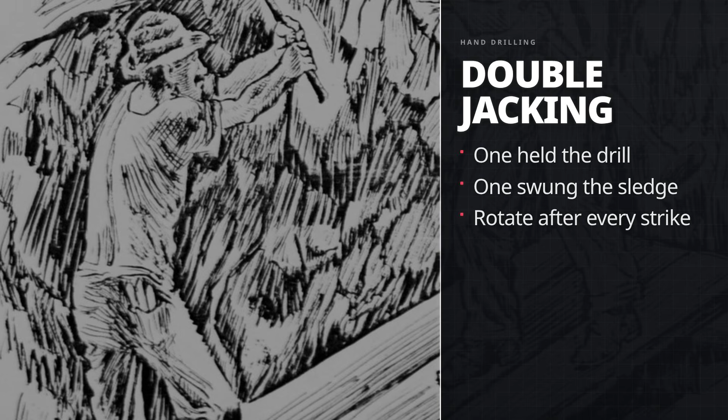Hour after hour: swing, rotate, swing. The sound inside the tunnel was a constant ringing of steel on steel, echoing off the wet rock walls in a space barely wide enough for two men to stand shoulder to shoulder. If you have never seen double-jacking done, you cannot fully appreciate what it demands. The man holding the drill trusts the man swinging the hammer with his hands, his fingers, his life.

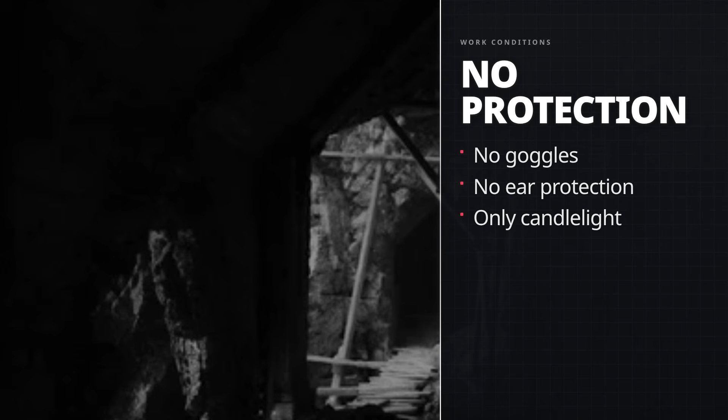A missed strike does not bruise, it shatters bone. The drill holder sits or crouches inches from the rock face, his ears ringing, his hands numb from vibration, stone chips peppering his face and eyes with every blow. There were no safety goggles. There were no ear protections. There was a candle or a whale oil lamp stuck to the wall with clay, and the air smelled of sulfur and sweat and wet stone, and you could taste the rock dust on your tongue.

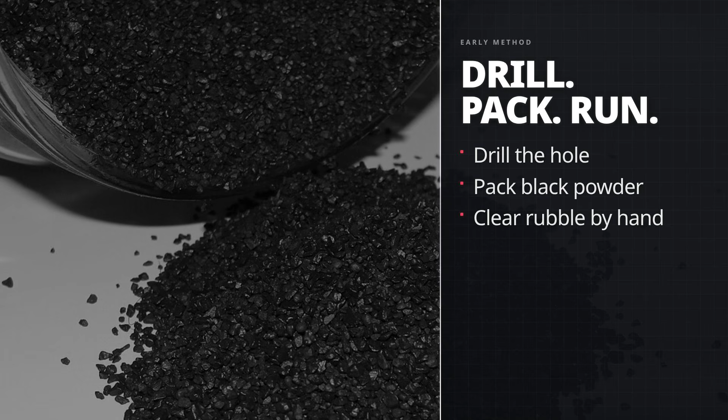They did this for 10 hours a day. When a hole was deep enough, perhaps 18 inches, perhaps 2 feet, they packed it with black powder and lit a fuse and ran. The explosion in that enclosed space was concussive, a punch of pressure and sound that left men's ears ringing for hours. Then they went back in, cleared the rubble by hand into wheelbarrows, and started drilling the next hole.

The rate of advance by hand was measured in inches per day. Some weeks, a crew might move the tunnel face forward 8 or 10 feet. On bad weeks, when they hit a seam of quartz so dense it dulled every drill they owned, they might manage 3. At that pace, boring 4 3/4 miles of tunnel would take longer than anyone involved would live. The mathematics of it were merciless.

25,000 feet of rock at 10 feet per week is nearly 50 years. Half a century of men swinging hammers in the dark.

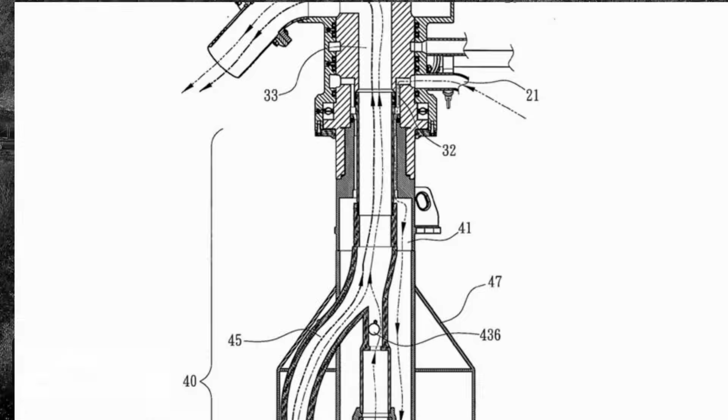Hermann Haupt arrived in 1856, brought in by a group of investors led by Edward Serrell. Haupt had engineered the Horseshoe Curve and the Gallitzin tunnels through the Allegheny Mountains for the Pennsylvania Railroad. He was one of the finest railroad engineers in the country. He also brought something the project desperately needed, which was his own money. He invested $20,000 personally and soon discovered that his fellow investors could not raise their share. Haupt became the largest single investor in a project that was already bleeding cash.

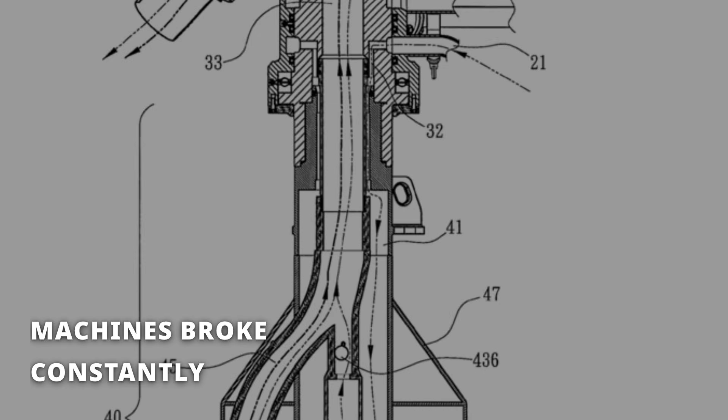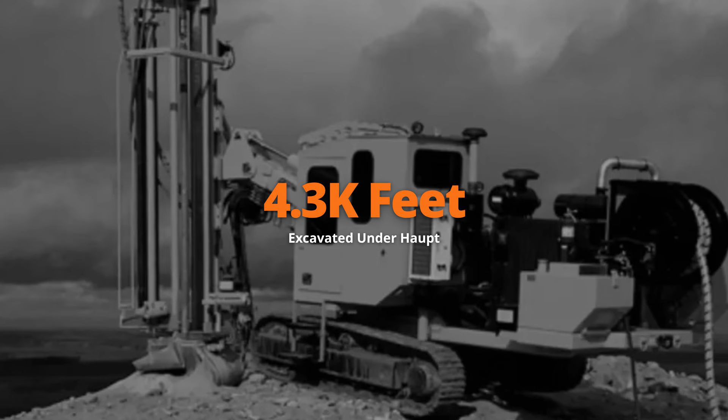Haupt pushed forward anyway. By the time he left the project in 1861, he had excavated about 4,250 feet, roughly 1/5 of the total distance. On the east end, they had managed 500 feet. On the west, 1,810. But Haupt did not leave by choice.

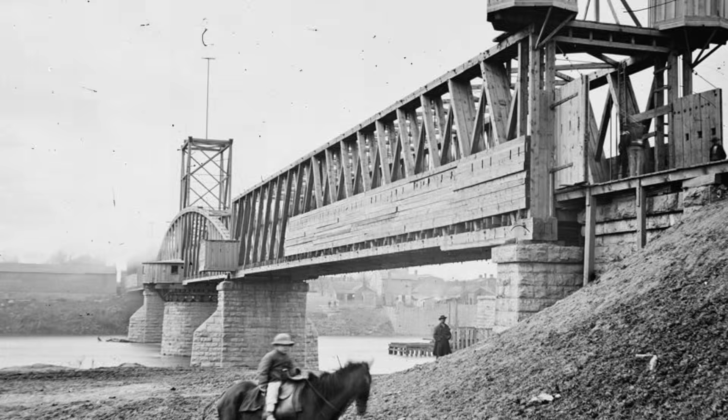The Western Railroad, a competing line that ran a southern route through Springfield and Pittsfield, had been fighting the Hoosac Tunnel from the beginning. They lobbied the Massachusetts legislature relentlessly to block state funding, and in 1861 they succeeded. The money stopped. The Troy and Greenfield Railroad went bankrupt. Haupt was financially ruined. And then the Civil War called him to Washington, where he would become one of the most important military railroad engineers the Union Army ever had, rebuilding bridges and rail lines under fire for the battles of Bull Run and Gettysburg.

He never came back to the Hoosac. He spent the rest of his life trying to recover his investment and received, after decades of litigation, 8 cents on every dollar he had put in.

The tunnel sat mostly idle for 2 years. Water seeped through the rock and pooled in the unfinished bore. Timbers rotted. The few men left on site did maintenance work and little else. The mountain was winning. In 1863, the Commonwealth of Massachusetts foreclosed on the Troy and Greenfield Railroad and took direct control of the tunnel project.

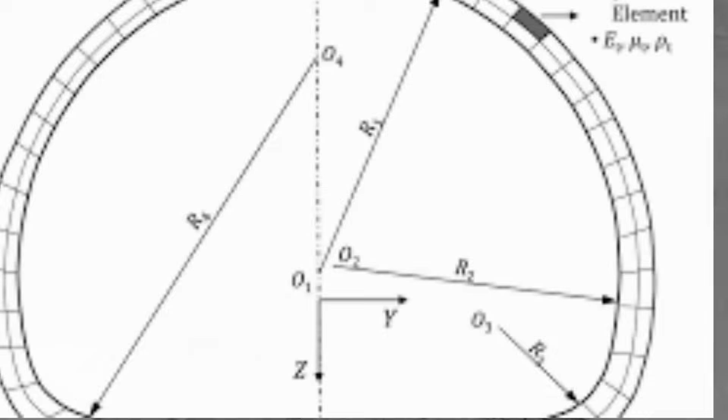Alvah Crocker, now the state superintendent of railroads, appointed Thomas Doane as the new chief engineer. Doane was methodical, where Haupt had been visionary. He did not invent new machines. He studied the ones that existed and figured out how to make them survive inside the mountain. But the real problem was not machinery. It was geometry. The tunnel had to be straight, dead straight.

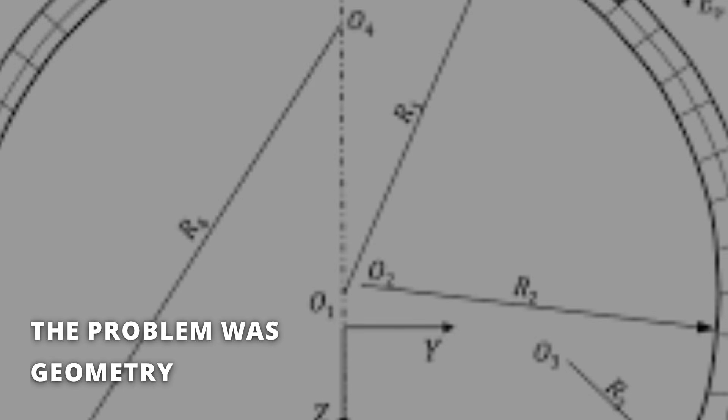4 3/4 miles of perfect alignment through solid rock, bored from two ends that could not see each other, with the mountain itself blocking any line of sight between them. If the two halves missed each other by even a few feet, the entire project could fail. And Doane knew that working from only two faces, east and west, would take decades more.

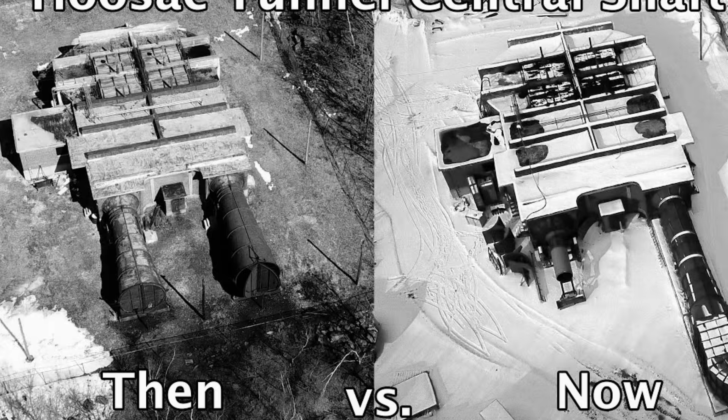So Doane proposed something that had never been attempted at this scale in America. He would sink a vertical shaft from the summit of the mountain straight down into the projected path of the tunnel, 1,028 feet below the surface. Once the shaft reached tunnel level, crews could begin digging outward in two directions from the center, creating 4 working faces instead of 2. The tunnel could then be excavated simultaneously from the east portal, the west portal, and both directions from the central shaft.

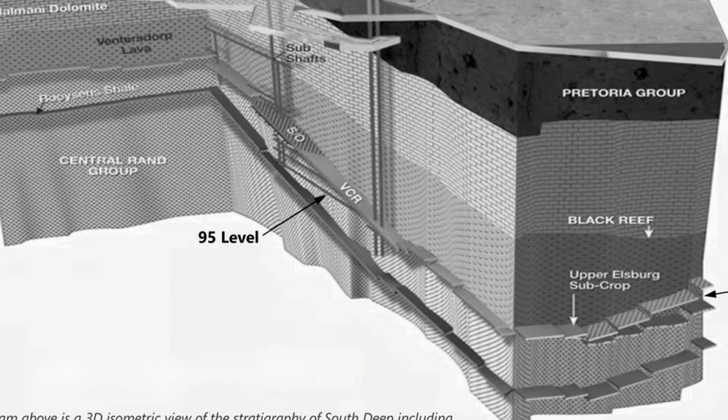The math was simple. 4 faces meant roughly twice the speed. The problem was the shaft itself: 1,000 feet straight down through living rock.

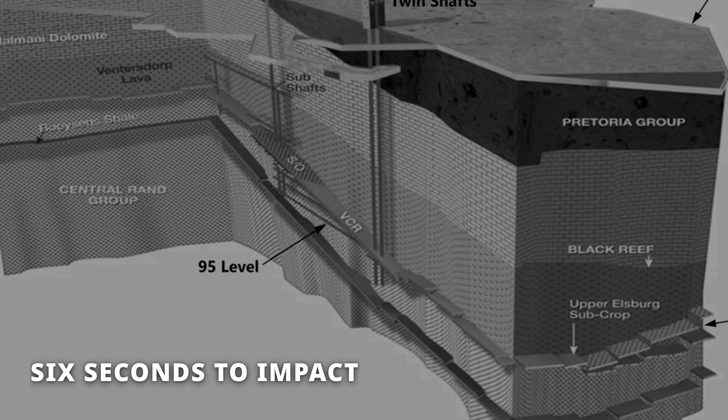Think about what that means. Imagine standing at the edge of a hole in the earth that drops straight down for 1,000 feet. That is taller than any building in America at the time. Taller than any building in the world at the time. You cannot see the bottom. You cannot hear the bottom. If you dropped a stone, you would count to 6 or 7 before you heard it hit.

You lower men and equipment on a wooden hoist down a hole barely wide enough for the platform. And at the bottom, they work in near total darkness, breathing air that has traveled 1,000 feet through a stone chimney to reach them. The temperature at the bottom of the shaft was constant, around 50 degrees, summer and winter, and the humidity was close to 100%.

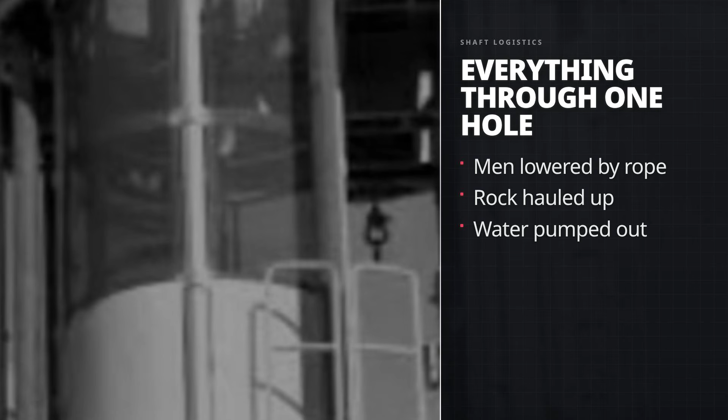Water dripped from every surface. The walls were slick with condensation. Every bucket of broken rock must be hauled back up that same shaft. Every barrel of water must be pumped out. Every tool, every timber, every ounce of black powder must go down the hole before it can be used. And the men who worked at the bottom rode an open wooden platform, suspended on ropes, with nothing between them and 1,000 feet of empty air except the strength of the hemp and the reliability of the winding mechanism above.

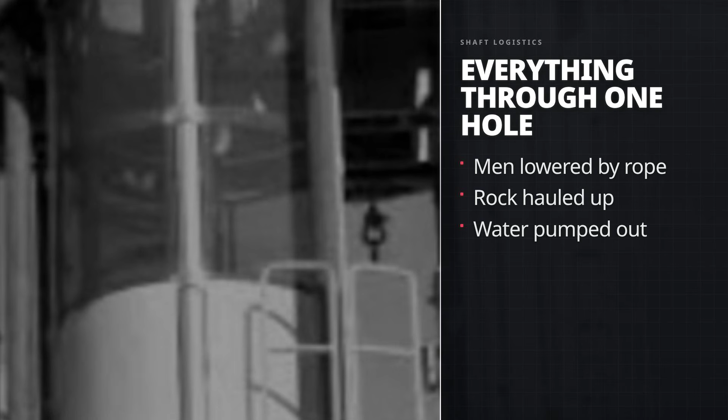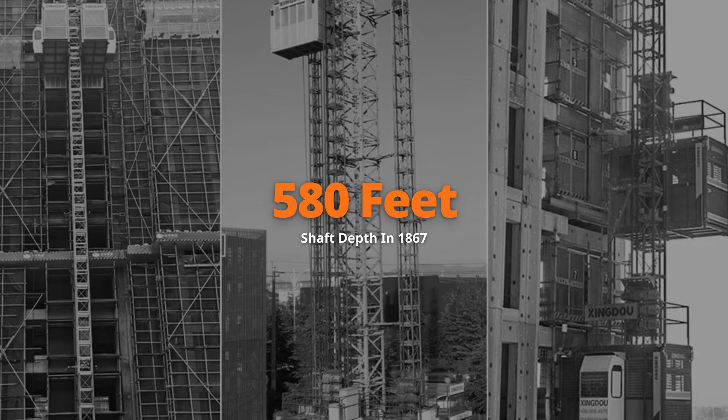Work on the central shaft began in 1863. It was slow, dangerous, miserable labor. By October of 1867, the shaft had reached a depth of roughly 580 feet. A hoist building sat on the surface directly above the shaft, housing the winding mechanism, the ropes, the tools. It also housed flammable materials, including oil for lamps, black powder for blasting, and a device called a gasometer that used gasoline fumes for illumination.

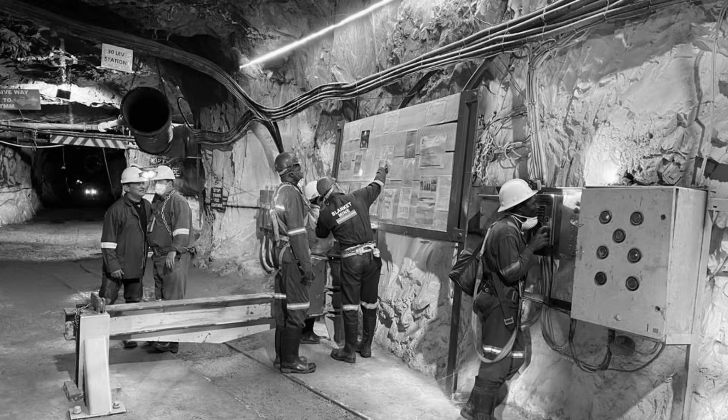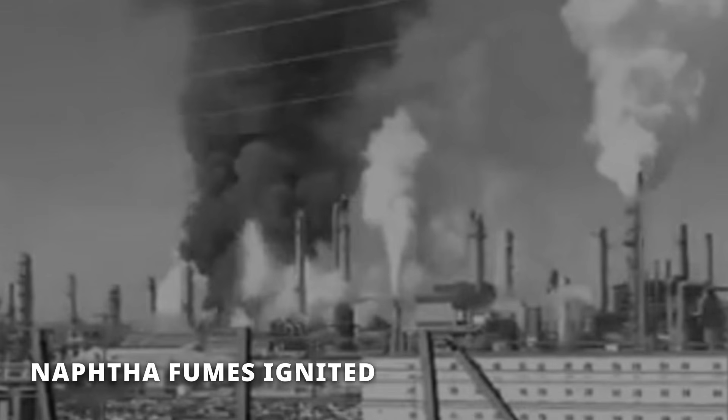On October 17, 1867, just after noon, 13 men descended into the shaft on the wooden platform. They were lowered to the bottom to continue digging. On the surface, 4 men worked in the hoist building. At some point that afternoon, a candle, or a spark, ignited naphtha fumes that had leaked from the gasometer. The explosion was immediate. Fire engulfed the hoist building, and the 4 men on the surface barely escaped with their lives. They tried to fight the fire.

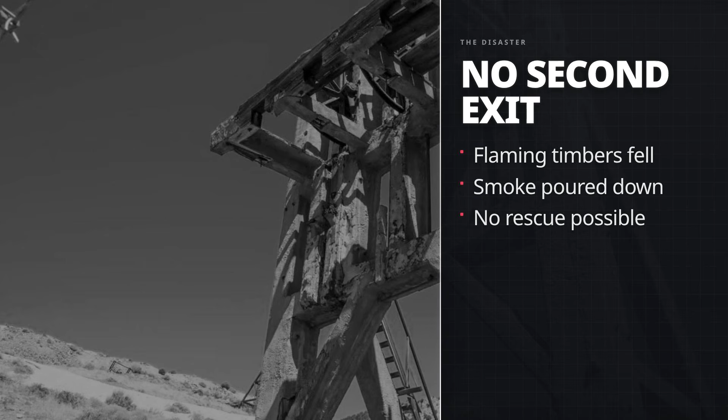They failed. The burning building collapsed directly into the open shaft, sending flaming timbers, machinery, and debris raining down 580 feet onto the 13 men below. Some of them were killed instantly, impaled by falling drill steel or crushed by burning timbers. Others were not killed by the falling debris. They were killed slowly, by the carbon monoxide and smoke that poured down the shaft like poison poured into a well. There was no second exit. There was no ventilation. There was no rescue.

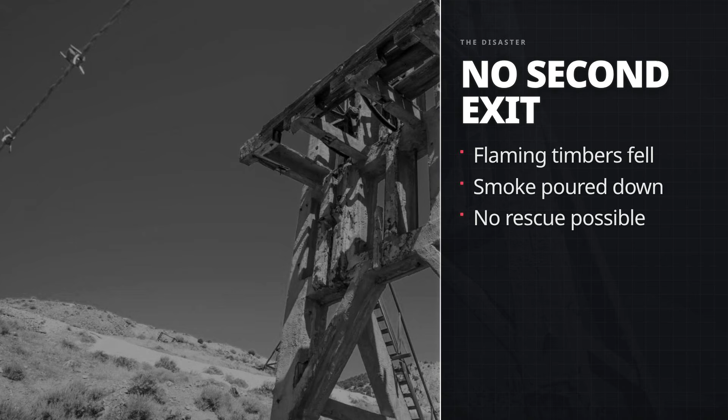It took a full year before crews could even recover the bodies. 13 men dead. It was the single deadliest day in the history of the Hoosac Tunnel, and it nearly ended the project entirely. Newspapers across Massachusetts called for the tunnel to be abandoned. Critics, including a young lawyer named Oliver Wendell Holmes Jr., who would later sit on the Supreme Court, had long mocked the project as the Great Bore.

Now they had 13 more reasons to bury it. But the state did not stop, and the reason was economic desperation. Massachusetts needed that western rail connection. The money already spent was a sunk cost so enormous that abandoning the tunnel would have been its own kind of catastrophe.

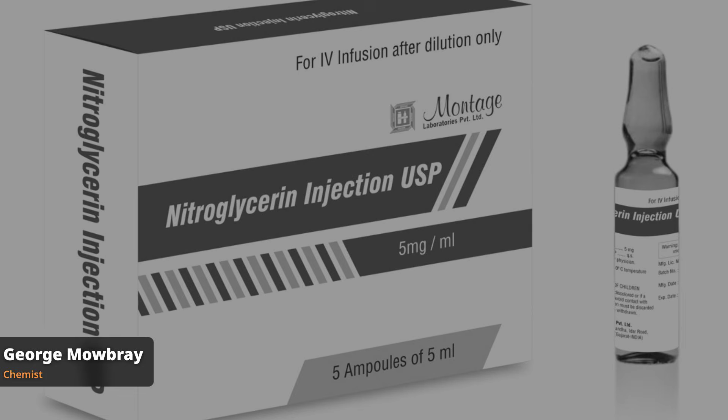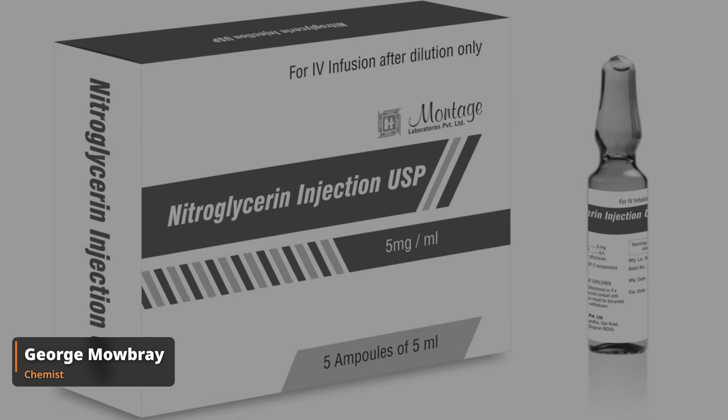So they pressed on, and in doing so, they reached for technologies that had never been used at this scale in America. The first was nitroglycerin. Black powder had been the standard explosive since the tunnel began, but black powder was slow and weak. It cracked rock, it did not shatter it. A chemist named George Mowbray, working out of a small laboratory in North Adams, had been following European experiments with nitroglycerin, an explosive 10 times more potent than black powder.

In 1866, Mowbray developed his own method for producing a modified form he called trinitroglycerin, and Thomas Doane authorized its use inside the tunnel with an electric firing system that allowed detonation from a safe distance using blasting caps and battery-powered circuits. The difference was immediate and staggering. Where black powder cracked and loosened rock, nitroglycerin shattered it. A single blast could advance the face by several feet instead of inches.

The sound was different too. Black powder made a dull, thumping boom. Nitroglycerin made a crack so sharp and violent that men working hundreds of feet behind the blast face could feel it in their teeth. Over the remaining years of construction, more than 500,000 pounds of nitroglycerin would be used inside the Hoosac Tunnel. It was the first large-scale commercial use of nitroglycerin in the United States, and it was terrifying.

The liquid was unstable. It could detonate from impact, from heat, from friction, from reasons that nobody fully understood. A jar dropped from waist height could kill every man in the room. Mowbray stored it in a specially built magazine outside the tunnel portals, and the men who carried it to the working face did so in small quantities, walking slowly, their hands steady, their breathing shallow. Workers learned to handle it the way you learn to handle a live snake, with absolute concentration and the knowledge that a single careless moment could be your last.

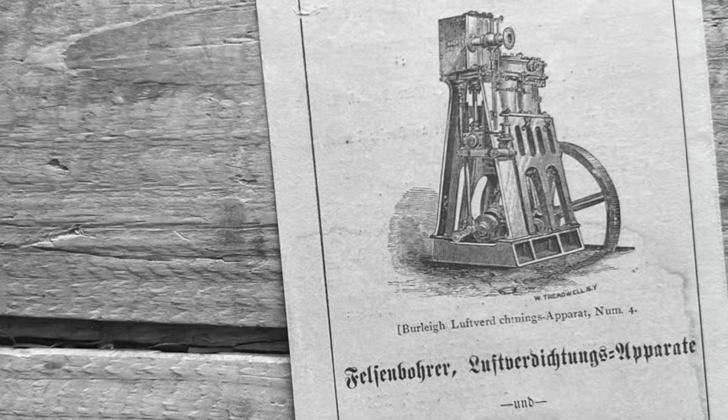The second innovation came from a man named Charles Burleigh. Burleigh was a steam engine builder from Fitchburg, Massachusetts, and in 1866, working with Stephen Gates and John Brooks, he patented a drill powered by compressed air. The Burleigh drill was the first commercially successful pneumatic rock drill in history, and it changed everything. Instead of two men swinging a hammer and rotating a bit by hand, a single machine could drive a piston against the drill steel 200 to 300 times per minute, advancing a hole at roughly a foot every 2 minutes.

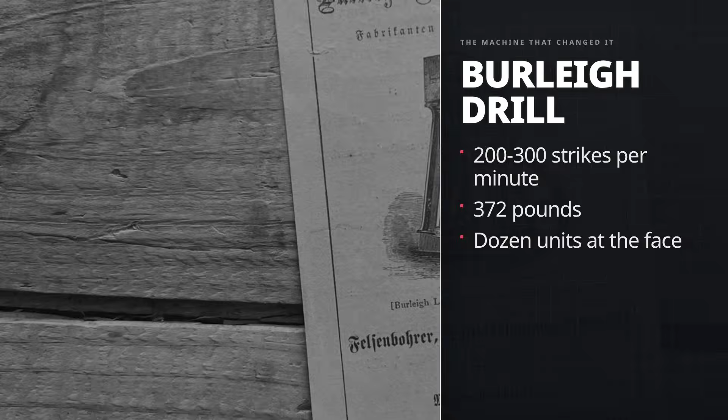The drill weighed 372 pounds and was mounted on a carriage that could support a dozen units at the tunnel face simultaneously. It pounded itself to pieces regularly. A quarter of the drills were down for repairs at any given time. But even at reduced capacity, it was 6 times faster than hand drilling.

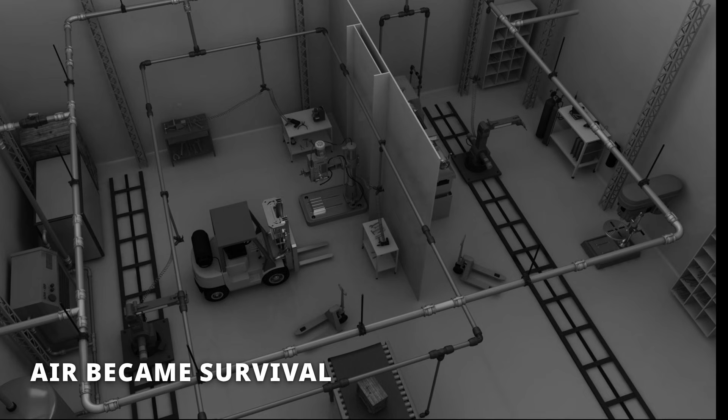Compressed air solved a second problem as well. The airlines that powered the Burleigh drills also ventilated the tunnel, pushing breathable air to the working faces, where men had been laboring in foul, smoke-choked darkness. For the first time, the tunnel could be worked without men choking on the residue of their own blasting.

The combination of the Burleigh drill, nitroglycerin, and the central shaft transformed the pace of construction. Under Doane, the central shaft reached its full depth of 1,028 feet in 1870, and crews began boring outward from the bottom in both directions. The tunnel was now being advanced from 4 faces simultaneously. Progress jumped from single-digit feet per week to over 100 feet per month.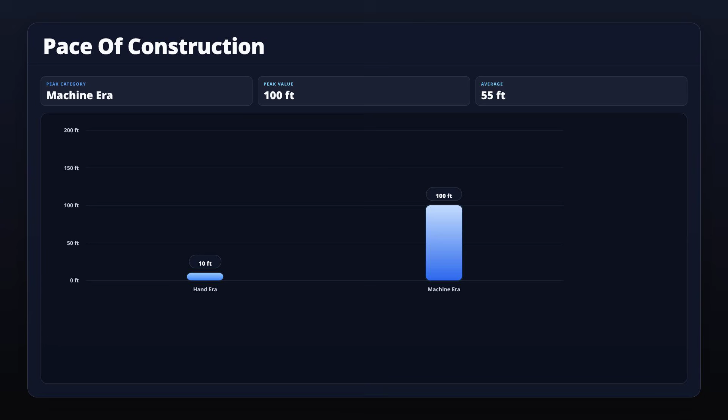But the cost in human lives did not stop. Nitroglycerin was unpredictable. Premature detonations killed men without warning. Rock falls buried others under tons of stone that shifted without sound. The shaft itself remained a death trap, with men riding the open wooden platform up and down 1,000 feet of darkness, a single frayed rope between them and the bottom.

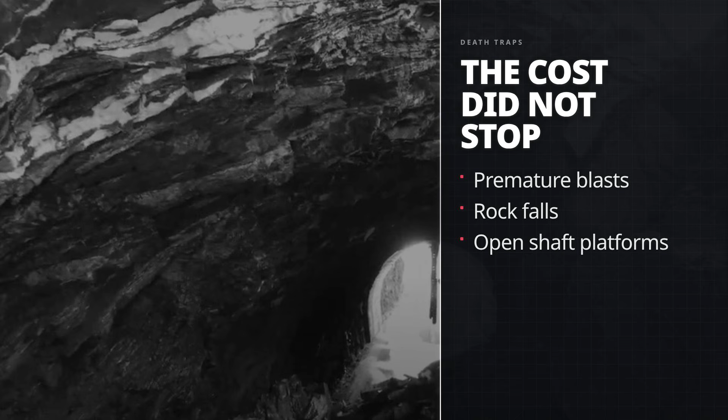In 1874, a 14-year-old boy named Orrin Wilson, the son of a tunnel worker, was found near the shaft with his head crushed by an elevator mechanism. He had been exploring. His friend ran away and was too afraid to tell anyone what had happened.

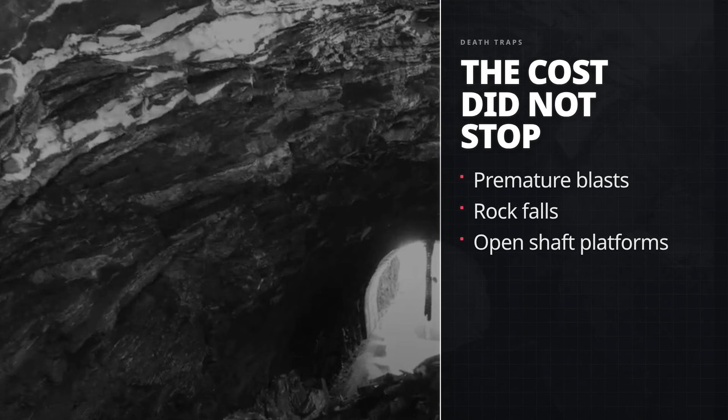In 1868, the Massachusetts legislature appropriated $5 million to finish the tunnel and hired a Canadian engineer named Walter Shanley, along with his brother Francis, to take over the contract. Walter Shanley was born in 1817 in County Laois, Ireland, educated by private tutors in Dublin, and had built his reputation engineering railroads across Canada. He was meticulous, disciplined, and completely unbothered by the scale of what he was being asked to do.

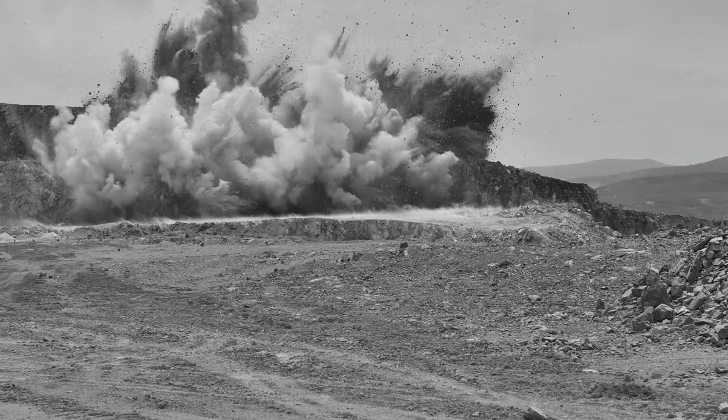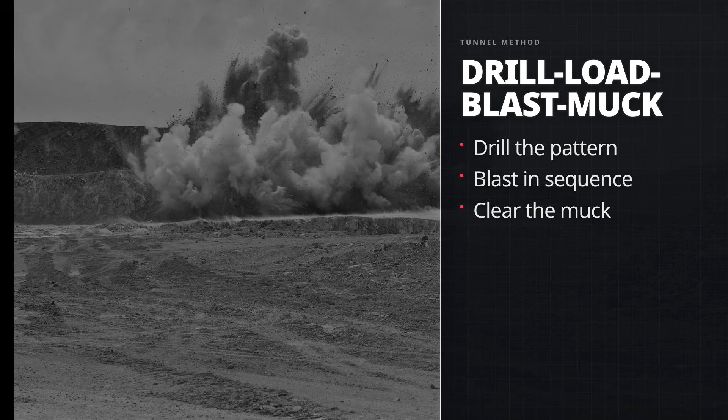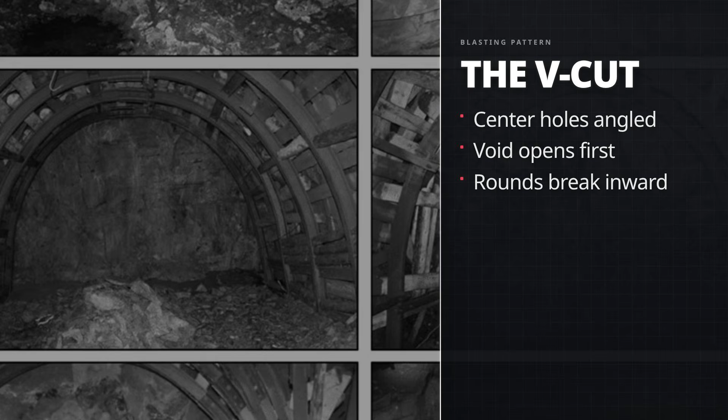The Shanley brothers brought organizational discipline to a project that had been lurching from crisis to crisis for 17 years. Walter systematized the drill, load, blast, muck cycle that would become the standard method for rock tunnel excavation for the next century. Crews drilled a pattern of holes into the face in a specific sequence. The center cut holes were angled inward so that when they detonated, they created a V-shaped void in the rock. Subsequent rounds of holes, detonated in sequence using electric blasting caps, broke rock inward toward that void. Then the muck crews moved in with wheelbarrows and hand carts to clear the debris, and the cycle began again. It was brutal, methodical, relentless work, and under Shanley, the tunnel advanced faster than it ever had.

The daily routine inside the mountain never changed. A shift began with the drill crews moving to the face, setting up the Burleigh drills on their carriages, and beginning to bore the pattern of holes that the blasting plan required. The noise was extraordinary. A dozen pneumatic drills pounding simultaneously in a confined stone chamber created a sound pressure that modern occupational safety standards would classify as immediately dangerous. The men worked without hearing protection. Many of them went partially deaf within months.

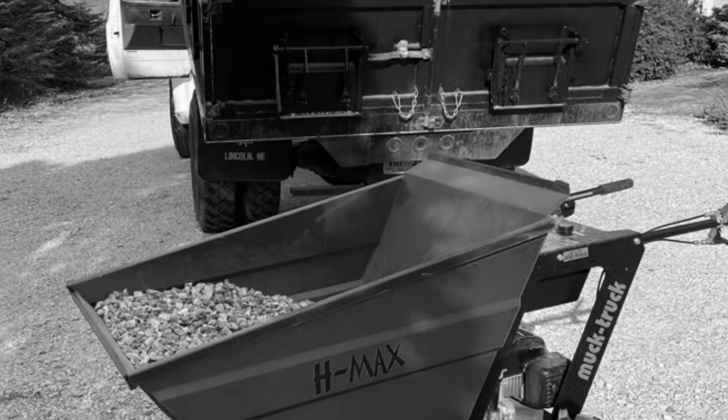When the holes were drilled, the blast crew moved in. They loaded each hole with nitroglycerin, inserted the electric blasting caps, ran the wires back to a safe distance, and fired the shot. After the blast, they waited for the dust and fumes to clear, sometimes 20 minutes, sometimes longer, depending on how well the air compressors were ventilating the heading. Then the muck crews came in. These were the men with the wheelbarrows, the shovels, the iron pry bars. They loaded the broken rock by hand and hauled it to rail cars that carried it out of the tunnel. Every ton of the 1 million tons of rock removed from the Hoosac tunnel was handled this way, by hand, into a wheelbarrow, onto a car, out of the hole.

By 1871, Francis Shanley had returned to Canada, and Walter remained alone as the resident engineer, driving the work forward with a single-minded intensity that consumed his entire life. He turned down opportunities to work on the Canadian Pacific Railway, confessing in a letter that the Pacific was perhaps too big a thing for him. The Hoosac was enough. Nearly 900 men worked under his direction, organized into shifts that kept the tunnel active around the clock.

Cornish miners, many of them immigrants who had learned hard rock drilling in the tin mines of Cornwall, England, made up a significant portion of the skilled workforce. They knew stone the way a carpenter knows wood. They could read the grain of the rock, feel the vibration through the drill steel, and know when a seam was about to let go. They brought a tradition of underground labor that stretched back centuries, and they brought something else, a stubbornness, a refusal to be beaten by a mountain, that matched the stubbornness of the engineers who had been fighting the Hoosac for 2 decades.

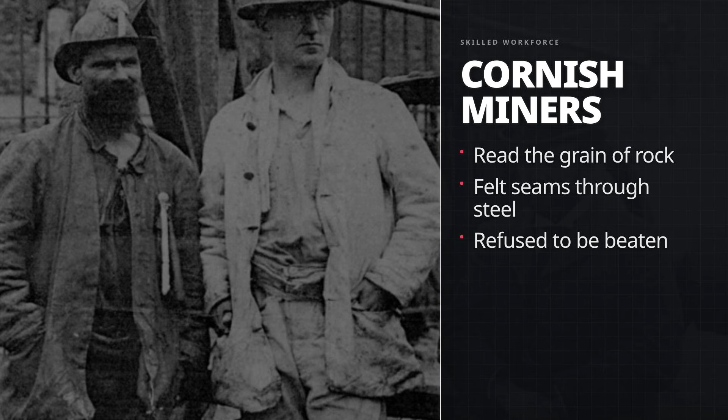But here is the thing about boring a tunnel from 4 faces that must all converge on the same imaginary line through nearly 5 miles of solid mountain. You cannot see from one end to the other. You cannot use a surveyor's transit to sight through the rock. You are boring blind, guided only by mathematics and the precision of your instruments.

Thomas Doane had devised the alignment system before Shanley arrived, and it was an act of engineering genius that deserves its own recognition. Doane constructed 6 survey towers on the peaks and ridge lines above the mountain. Each tower had a stone foundation, a sloped wooden roof, and a transit scope mounted at a precise elevation. A red and white pole extended 25 feet above each tower.

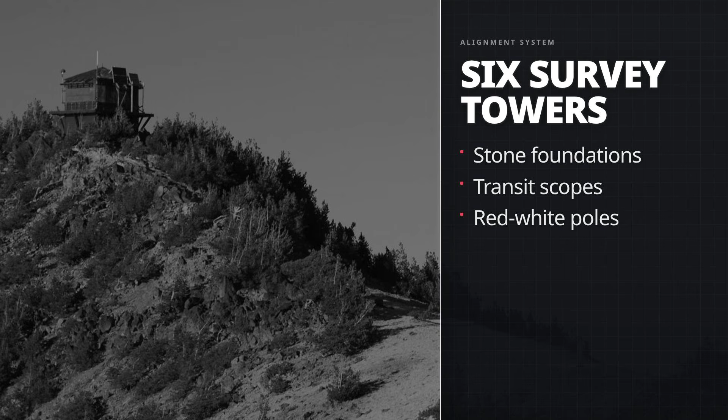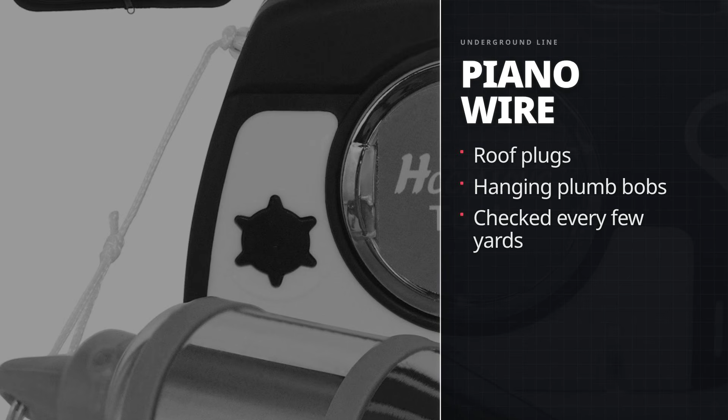In those days, the mountains had been cleared for farmland, so you could see from one tower to the next across miles of open hillside. Doane sighted a perfectly straight line from the east portal to the west portal, running from tower to tower across the summit. Inside the tunnel, surveyors drove wooden plugs into the roof at intervals and hung plumb bobs from piano wire, creating an interior reference line that extended the surface alignment deep underground.

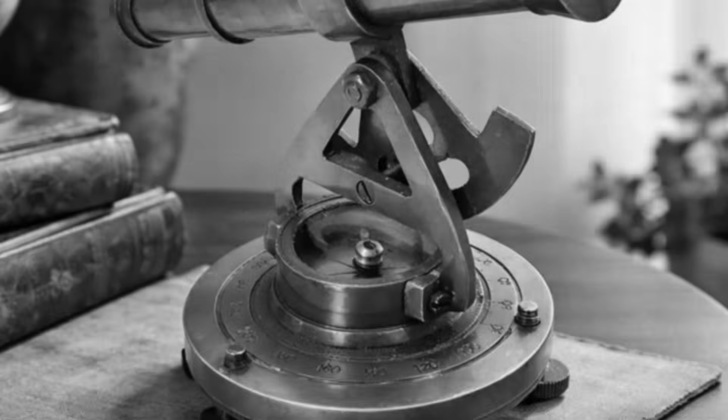The blasting crews followed the plumb bobs. Every few yards, surveyors checked the line. Any deviation was corrected immediately. Think about the tolerances involved. These men were using instruments made of brass and glass, sighting through telescopes in wind and rain, hanging piano wire in a tunnel that shook every time a charge detonated.

They were aligning a tunnel that ran for 25,000 feet through solid rock, from 4 separate headings that could not see each other, and they had to hit a target the size of a doorway in the center of a mountain.

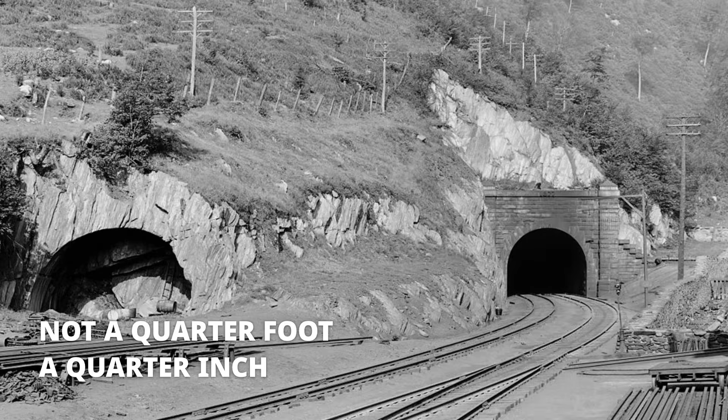On December 12, 1872, crews digging eastward from the central shaft broke through to meet the tunnel being bored westward from the east portal. The two headings were aligned within 9/16 of an inch, less than the width of a man's finger. Then, on November 27, 1873, the final breakthrough came. The western heading from the central shaft met the tunnel being driven eastward from the west portal. The alignment was off by less than 1/4 of an inch. Not 1/4 of a foot, 1/4 of an inch.

Through 4 3/4 miles of mountain, using 19th century instruments, in a tunnel that had been under construction for 22 years. How is that even possible?

I have driven the highway that runs over the Hoosac Mountain, Route 2, the Mohawk Trail, and even in a car you feel the mountain. You feel the climb, the weight of the ridgeline above you, the dense forest that closes in on both sides. And somewhere beneath you, 1,000 feet below the road, there is a tunnel that men cut with drills and nitroglycerin and the unaided precision of their own surveying instruments. And those men got it right to within a fraction of an inch. You cannot stand on that mountain and not feel something close to awe.

The tunnel was not yet finished at breakthrough. The raw bore had to be lined to create a permanent structure that could withstand the immense weight of the mountain above it. Over 20 million bricks were used to line the interior, creating a continuous arch from portal to portal. The bricks were made locally and hauled into the tunnel on rail cars, then laid by hand by masons who worked in near darkness, building curved forms and filling them course by course.

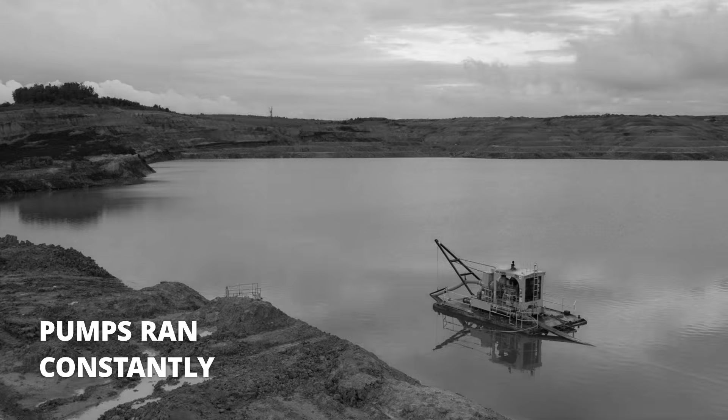The water was cold. It seeped from every crack and joint in the rock, and it never stopped. Pumps ran constantly, hauling water out of the low points so the crews could work. On some days, the pumps could not keep up, and men worked in flooded headings, their boots full of ice-cold groundwater, their clothing soaked through, the chill settling into their joints and staying there for the rest of their shift. The air in the western heading smelled of wet clay and iron and the organic decay of the demoralized rock itself, a smell like a basement that has been flooded for years.

The final cost of the Hoosac Tunnel is a number that depends on who you ask and how you count. The original estimate was $2 million. The Commonwealth of Massachusetts ultimately spent approximately $15 million, though some accounts push the total past $20 million, when interest on state bonds and related infrastructure is included. Either way, it was a staggering sum for the era.

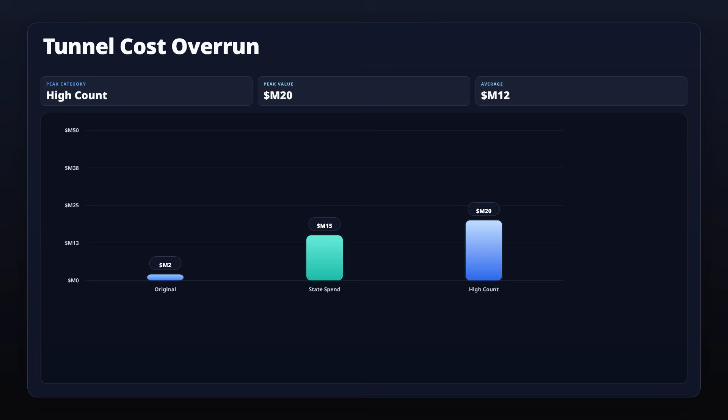Massachusetts had bet its fiscal future on a hole in the ground, and there were years when it looked like the mountain would win. On February 9, 1875, the first train passed through the Hoosac Tunnel, 24 years after construction began, 8 years after 13 men died in the central shaft, 3 years after Walter Shanley pulled off one of the most precise feats of underground surveying in the history of civil engineering, a locomotive rolled through 4 3/4 miles of mountain and emerged on the other side.

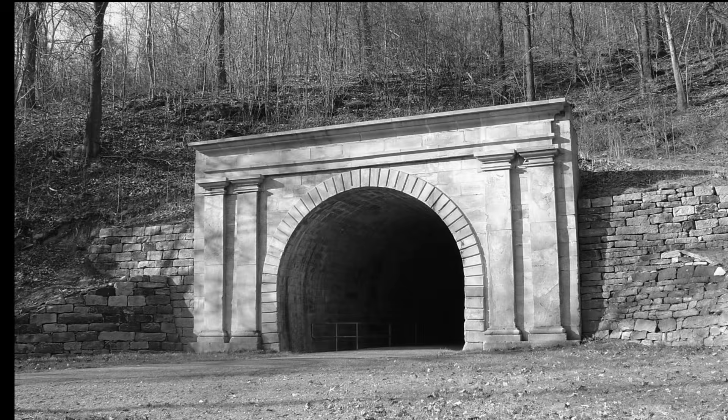At completion, the Hoosac Tunnel was the longest tunnel in North America and the second longest in the world, behind only the Mont-Cenis Tunnel through the French Alps.

195 workers did not live to see that train. Some of them died in the central shaft explosion. Some died in premature nitroglycerin detonations. Some died in rock falls, buried under stone that shifted without warning. Some fell from scaffolding. Some were crushed by equipment. Some drowned in the flooded sections of the western heading.

Many of their names were never recorded, or were recorded so carelessly that they cannot be recovered. The historical records list some of the dead simply as unknown. Others are identified only by a relationship, brother of someone, son of someone, not even a first name.

The Cornish miners who made up much of the skilled workforce were immigrants, men who had crossed an ocean to swing a hammer inside a mountain for wages that would barely cover their board. They brought their expertise in hard rock drilling and their willingness to do work that most Americans would not touch. They sang while they worked, a song called 'Drill Ye Terriers Drill,' and the lyrics are about exactly what you think they are about. Working all day for the sugar in your tea, down beside the railway.

I have stood at the site of the central shaft, on the forested summit of Hoosac Mountain in the town of Florida, Massachusetts. The shaft is still there, capped but visible, a stone-rimmed opening in the earth, surrounded by trees that have grown up over the last century and a half.

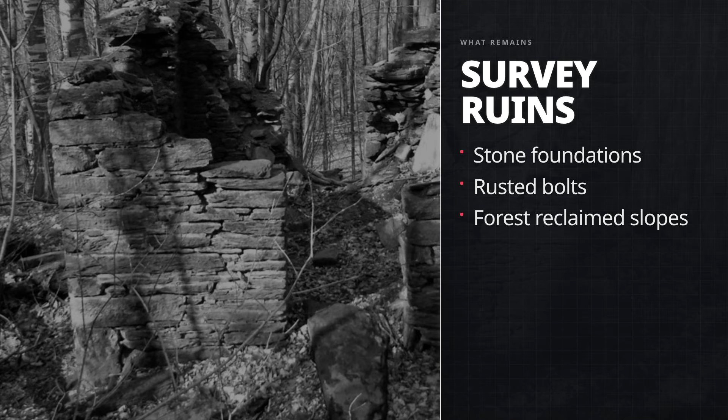4 of the 6 alignment towers that Doane built can still be found, if you know where to look. Stone foundations crumbling in the woods, their transit scopes long gone, the red and white poles rotted away. The forest has reclaimed the cleared slopes that once allowed surveyors to sight from peak to peak. But the bolts that held the alignment markers are still driven into the rock in places, rusted iron stubs poking out of boulders, like the last signatures of the men who put them there.

And the tunnel itself is still there. That is the part that stops me every time I think about it. The Hoosac Tunnel is not a museum. It is not a ruin. It is an active rail line. Pan Am Southern operates freight trains through it several times a day. A locomotive pulling 100 cars of containerized freight rolls through the same bore that was cut by men with hand drills and black powder, starting in 1851.

The stone portal at the east entrance, in the town of Florida along the Deerfield River, looks much as it did when the first train passed through in 1875. The western portal in North Adams has been modified over the years, fitted with a snow door in the 1950s, but the tunnel behind it is the same tunnel. The same rock walls, the same brick lining, the same alignment that Doane surveyed with brass instruments and piano wire.

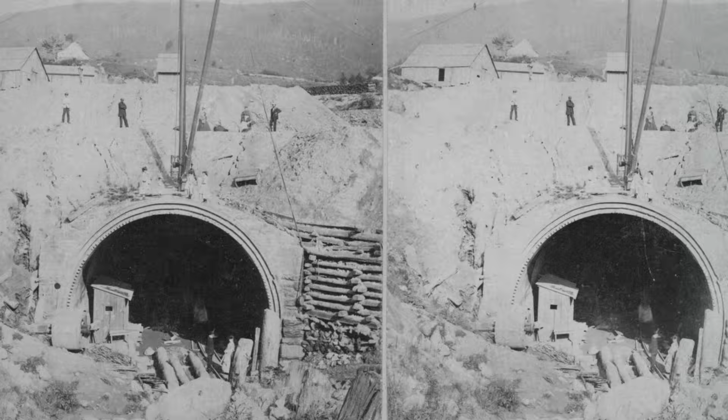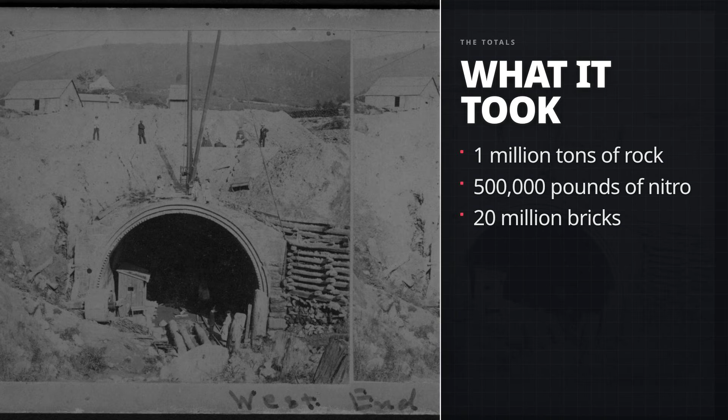1 million tons of rock were removed to create it. Over 500,000 pounds of nitroglycerin were detonated inside it. 20 million bricks line its walls. And 195 men gave their lives inside it, or beside it, or above it, doing work that most of us cannot even imagine. The Hoosac Tunnel was the fountainhead of modern tunnel technology.

That is not my phrase. That is the assessment of Lewis Cuyler of the Hoosac Tunnel Museum Society, and it is not an exaggeration. Every major rock tunnel built in North America after 1875 used methods that were pioneered inside the Hoosac.

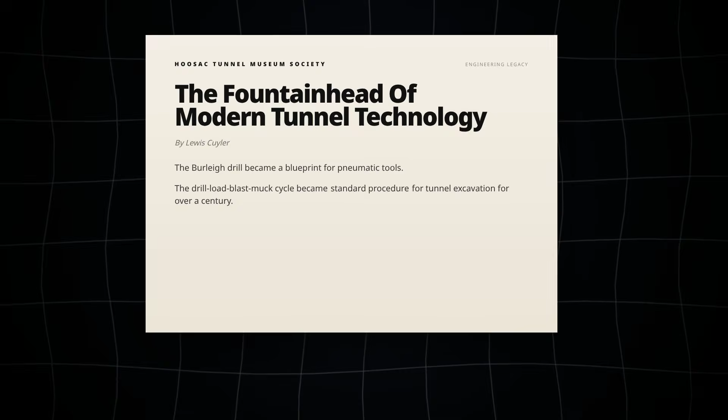The Burleigh drill became the blueprint for the entire pneumatic tool industry. The drill load blast muck cycle that Walter Shanley systematized became the standard operating procedure for tunnel excavation for over a century. The use of nitroglycerin and electric blasting caps, first employed commercially at the Hoosac, became universal. Even the concept of the central shaft, sinking a vertical access point to multiply working faces, became a standard technique for long tunnel construction worldwide.

In 1975, exactly 100 years after the first train passed through, the American Society of Civil Engineers designated the Hoosac Tunnel a historic civil engineering landmark. But here is what stays with me more than any of the engineering, more than the quarter-inch alignment, more than the 1 million tons of rock, more than the 500,000 pounds of nitroglycerin.

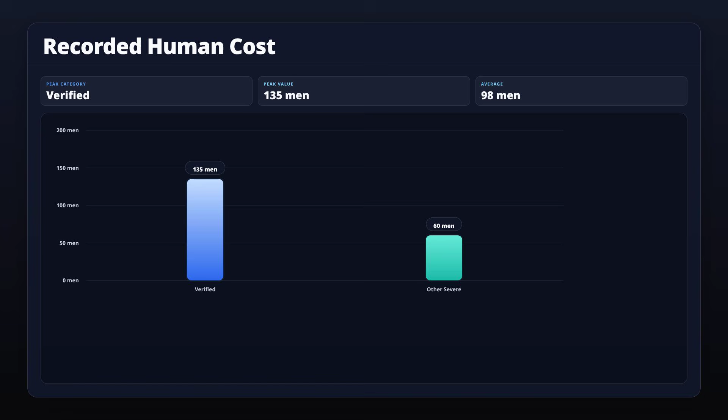It is the men whose names we do not know. The records list 195 dead. 135 of those deaths are verified. Another 60 were injured so severely that they never worked again, or survived only briefly after their injuries.

But the record-keeping was careless. Many of the dead were immigrants. Many were transient laborers who came to the mountain because there was work and left it in a pine box, or not at all. Their families waited at the tunnel entrance, sometimes for days, for news of a husband or a father or a brother who had gone down the shaft and not come back up.

The historical accounts describe women weeping at the portals, children asking when their father was coming home. And sometimes the answer was that nobody knew, because the body had not been found, or had been found but could not be identified, or had been identified but the name was spelled 3 different ways in 3 different records, and now nobody is sure which name was real.

19-year-old men, 40-year-old men, a 14-year-old boy who was not even supposed to be there, miners from Cornwall, laborers from Ireland, men whose only monument is a hole through a mountain that still carries freight trains 150 years after they died making it.

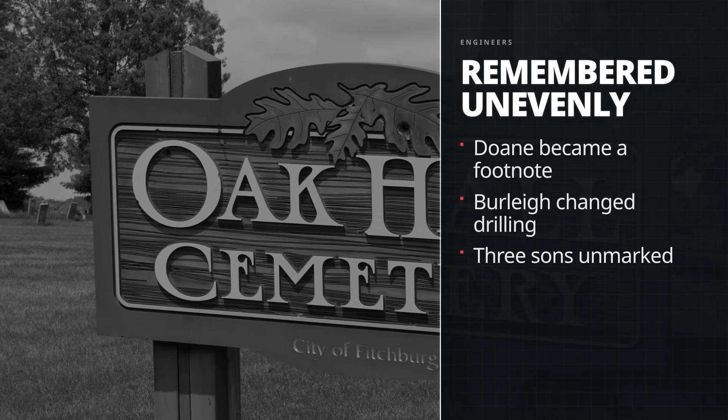Thomas Doane, the engineer who solved the alignment problem that made the tunnel possible, is a footnote in most histories. Charles Burleigh, whose compressed air drill launched an entire industry and changed the face of mining and construction worldwide, died in 1883 and is buried in Fitchburg, Massachusetts, in a lot with his 3 sons, none of whom have markers.

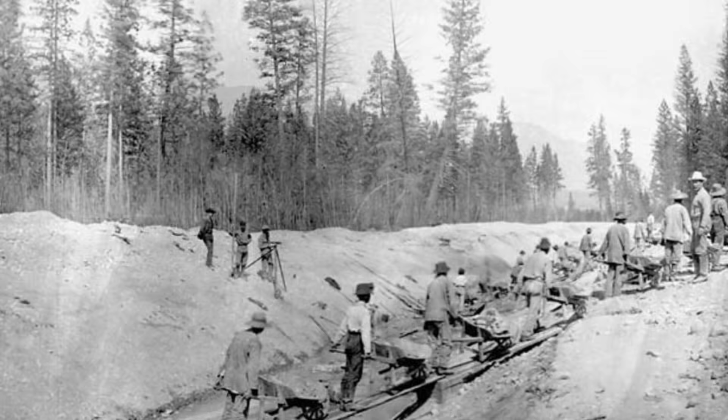Walter Shanly, the man who actually finished the thing, went back to Canada and spent the rest of his career in railroad engineering and politics, but the Hoosac was the work that defined him. He died in 1899 in Montreal.

And the workers, the 195. The Cornish drillers and the Irish laborers and the unknown men listed in the records as simply unknown. They are still inside that mountain in a way that none of the engineers are. Their dust is in the rock. Their sweat is in the brick lining.

The tunnel they built with their hands and their backs and their lives is still open, still carrying trains, still doing the thing it was made to do.

I have driven over the Hoosac Mountain many times, and every time I do, I think about the fact that 1,000 feet below my wheels, there is a tunnel that took 24 years and 195 lives to build, and it is still working. The mountain is still there.

The tunnel is still there. The men who made it are gone, but the hole they cut through the rock remains. And freight trains still pass through it, several times a day, through the same passage that was once lit by candles and filled with the sound of hammers striking steel.

In a darkness so complete that the men who worked at the face could not see their own hands without a lamp. They did that. They went into the mountain and they opened it, and they did not come out whole. But the tunnel did, and it has not closed in 150 years.